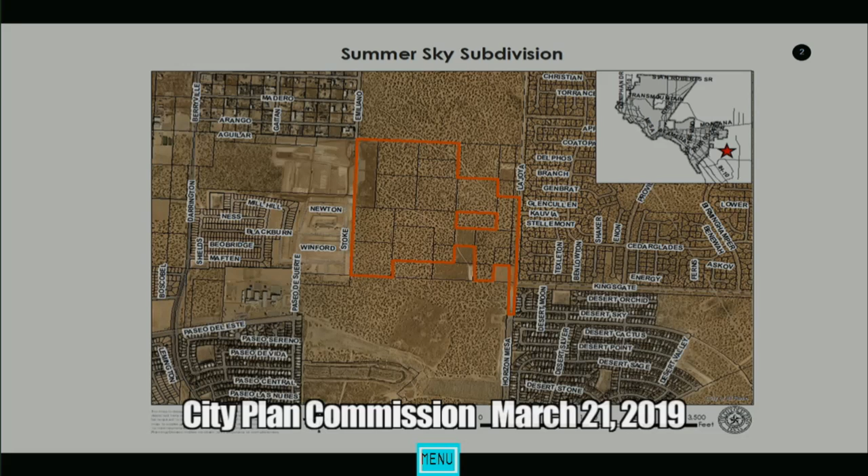Good afternoon, Chair, members of the Commission. Brenda Cantu with Planning and Inspections. Item number 1 on the agenda is Summer Sky Subdivision, a major preliminary application. Before I begin, I wanted to make a floor amendment to the first page of the staff report. It's stating under the summary of requests that there's 598 single-family residential lots, but it should be 599.

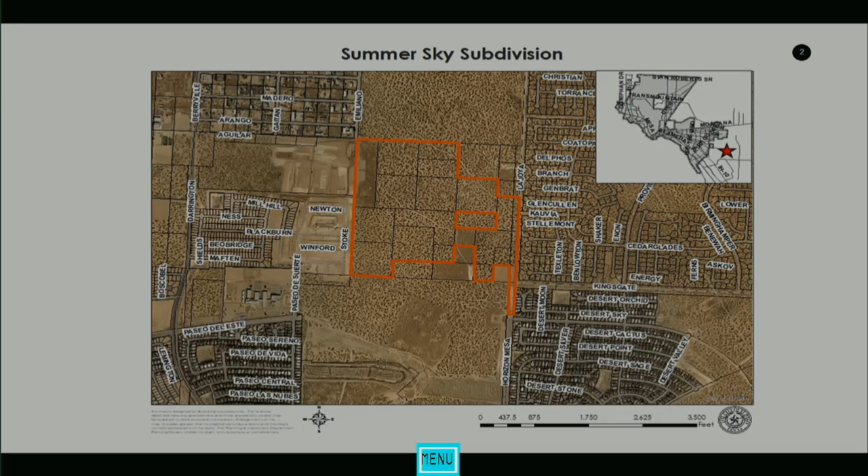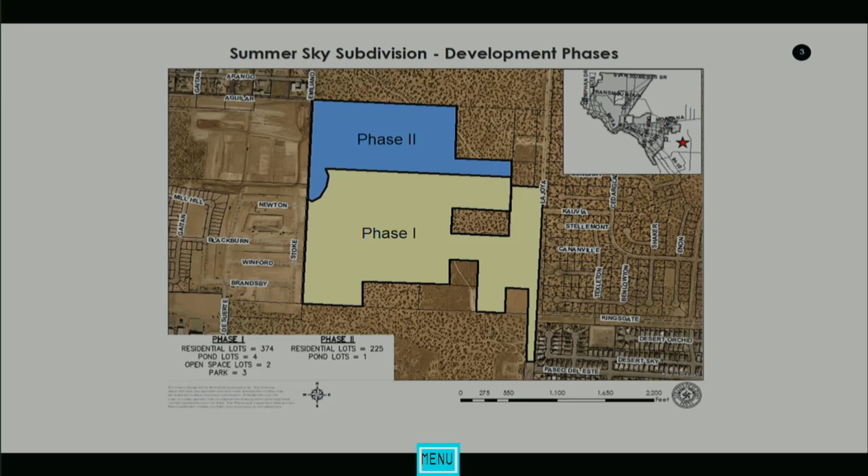This subdivision is located in the City of El Paso's ETJ, east of Darrington and north of Eastlake. The applicant proposes 599 single-family residential lots, 3 parks which include a linear park, and 5 drainage ponds. The proposed development will be done in 2 phases. Phase 1 is scheduled to be completed in September 2020, and Phase 2 will be completed by March 2022. This subdivision is being reviewed under the current subdivision code, and primary access is through Horizon Mesa, Garforth Avenue, and Winford Avenue.

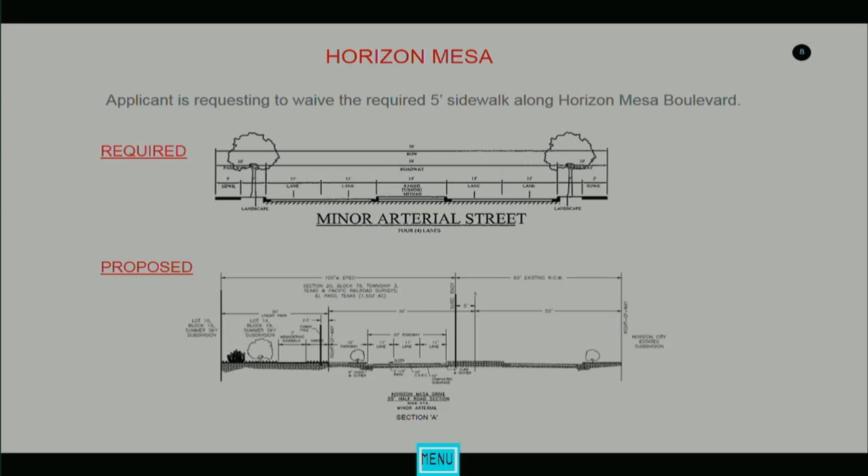This is a preliminary plat. The applicant is requesting to waive the required 5-foot sidewalk along Horizon Mesa Boulevard. In lieu of the sidewalk, the applicant is proposing a meandering 7-foot sidewalk within the abutting linear park on Horizon Mesa. This is required in the proposed cross-sections, required and proposed for the local residential streets.

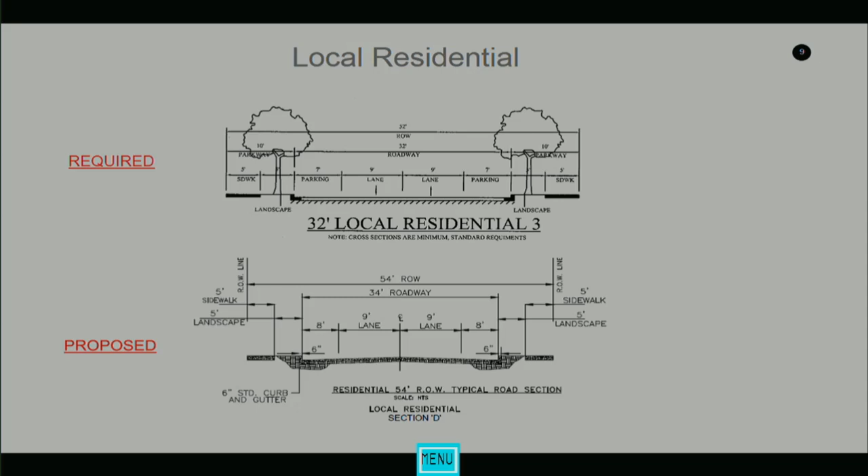Development Coordinating Committee and staff recommend approval of Summer Sky Subdivision on a major preliminary basis, and that concludes my presentation. Thank you. Any questions for staff? Nope. Can we hear from the applicant, please?

Good afternoon, Chair and members of the Commission. Santiago Vallejo for the record. Item 2 on the agenda is CMC Unit 5, a re-subdivision combination application. The subdivision is located west of Resler and south of Transmountain. Here's the aerial. The applicant is proposing to subdivide 20.596 acres into 5 commercial lots.

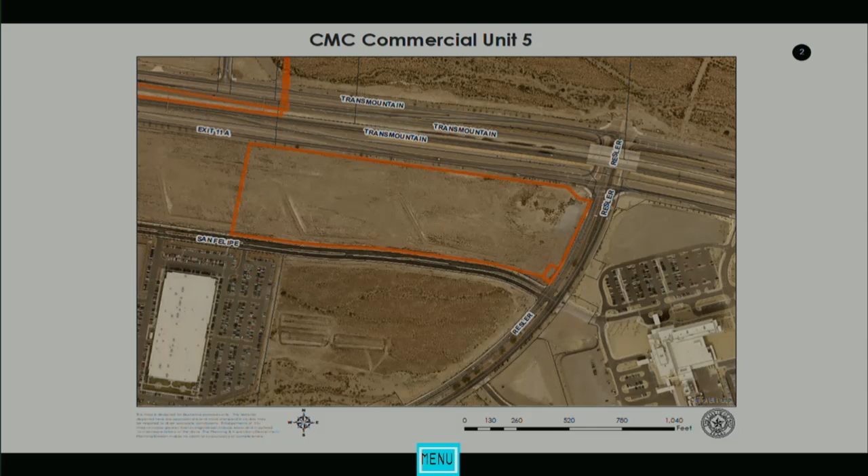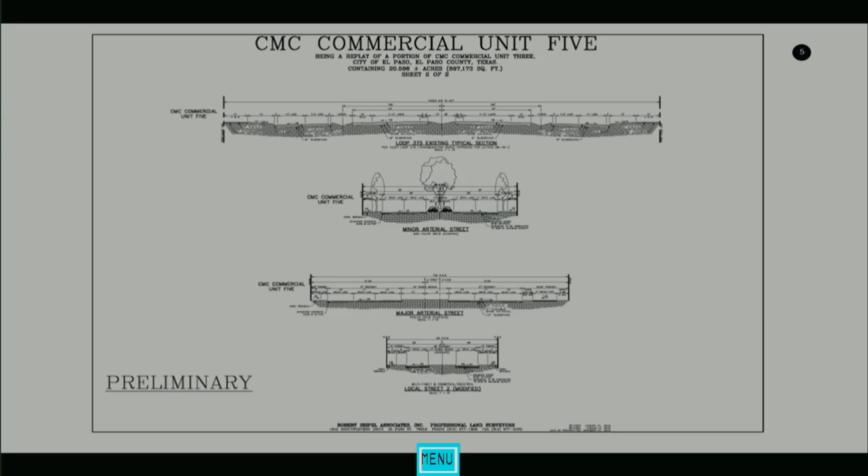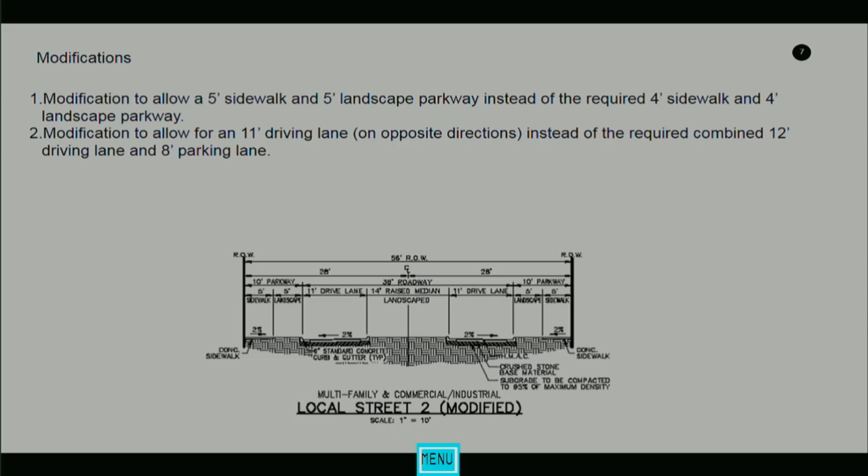The applicant is requesting a modification to allow for a 5-foot sidewalk and a 5-foot landscaping area within the cross section found on this slide. They're also requesting a modification to allow for 11-foot driving lanes in opposite directions. The overall right-of-way will increase to 56 feet.

Planning staff and the DCC recommend approval of CMC Commercial Unit 5 on a re-subdivision combination basis, and also recommend approval of the requested modifications. Thank you, that's my presentation.

Thank you. Any questions for staff? May we hear from the applicant, please? Good afternoon, Chair and members of the Commission. Adrian Ontiveros with CSA Design Group.

We concur with staff comments with the exception of streets and maintenance. However, we're going to continue discussions after action has been made today. We'll continue to coordinate and find a resolution with streets and maintenance.

Okay, what's the issue? Is there an issue? They're questioning the acceptance of the proposed right-of-ways as public. However, we're going to continue discussions after today's hearing. We've already coordinated with streets and maintenance. We're just going to continue discussions.

Great, thank you. Any questions for the applicant? This is under the public hearing section. Although no one signed up to speak on this item, now would be your chance. Nope. We'll go ahead and close for further discussion or motion.

Motion to approve. Second. All in favor? Aye. Thank you. Thank you very much. Item number 3, SU 17-00030.

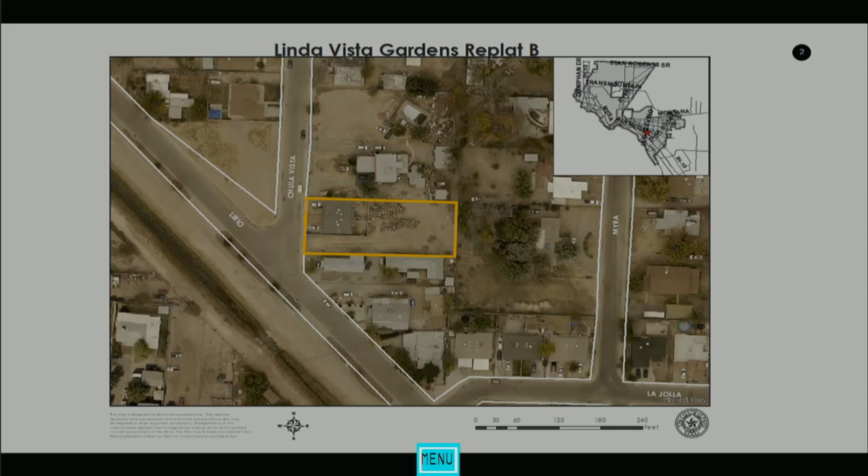Access to the subdivision is from Chula Vista. This is a final plat superimposed onto the aerial. The applicant is proposing to re-subdivide .4397 acres. The proposed development is for a single-family home and an existing duplex. This subdivision was reviewed under the current subdivision code.

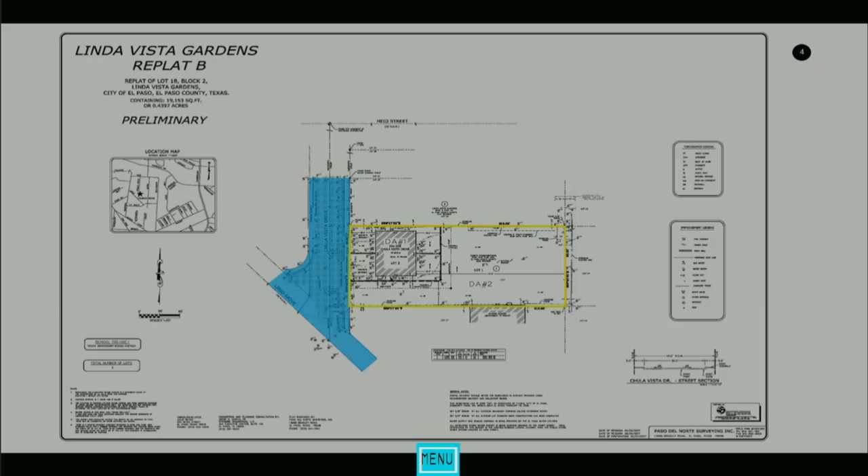This is the preliminary plat. This is the final plat. This is the existing and required cross-section for Chula Vista. The applicant is requesting an exception to waive the required street improvements to the applicant's proportionate share. Currently, the applicant is short 1 foot of additional pavement and the 5 feet required of landscape parkway.

The applicant proposes to preserve the existing configuration of Chula Vista, which consists of a 40-foot right-of-way with 30 feet of pavement and 5-foot sidewalks.

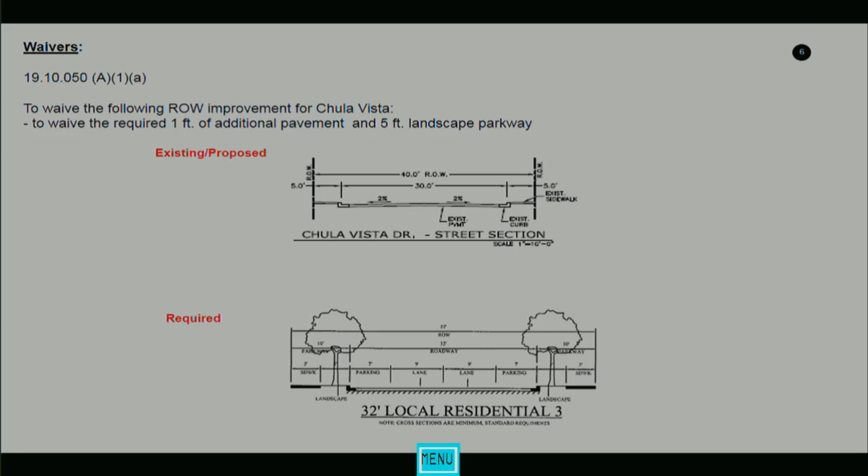Under section 19.10.050A, the City Plan Commission may waive such requirements to provide right-of-way or street improvements to adjacent substandard roads if 50% of the lots within a quarter mile of the proposed development have already been developed and the existing street improvements are in character with the neighborhood.

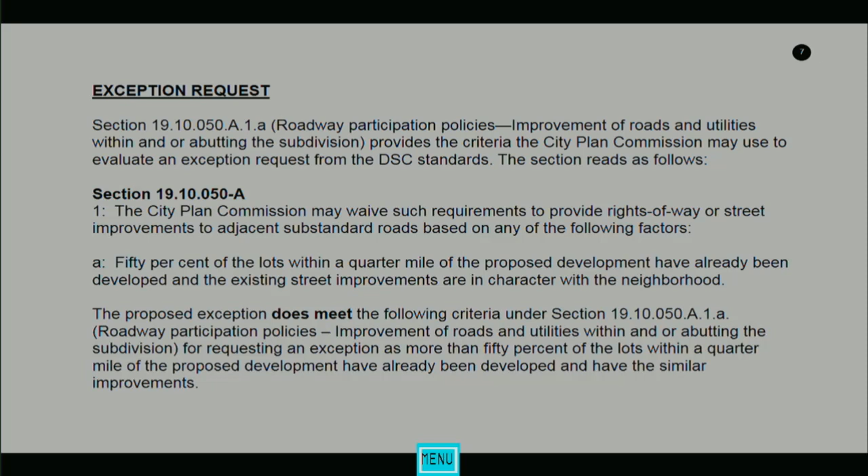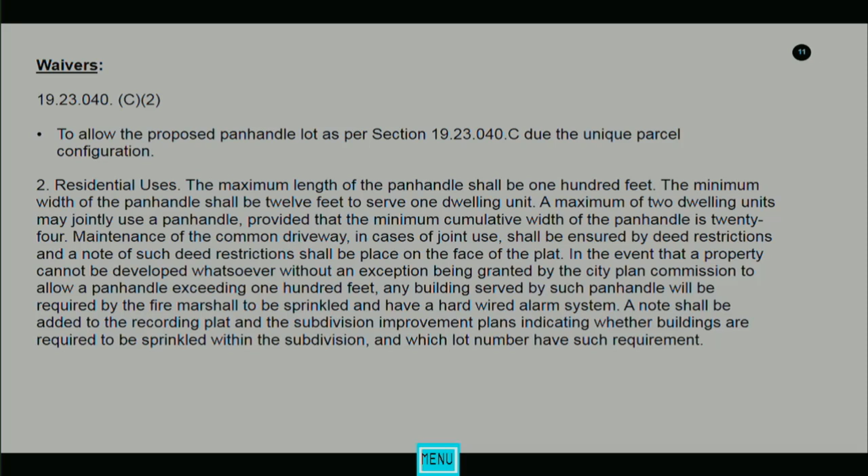And planning did not receive any communication, and additionally, the applicant is also requesting an exception request to allow the proposed panhandle lot as per section 19.23.040 due to the unique parcel configuration.

Planning did not receive any communication in support or opposition to this request. With that, planning recommends approval of Linda Vista Gardens Replat B on a re-subdivision combination basis. That concludes my presentation. Thank you. Any questions for staff? May we hear from the applicant, please?

Hello, City Council. My name is Julio Reyes. I agree with everything. Okay, thank you.

Any questions for the applicant? Nope. This item is listed under public hearing section. No one signed up to speak on it, but now would be your opportunity. Okay, we'll go ahead and close for further discussion or a motion. Motion to approve. I second. All in favor? Aye. Thank you.

Item number 4, SU 18-00105.

Good afternoon, Chair and members of the Commission. Giovanni Francia with Planning and Inspections. Item number 4 is Sunrise Acres number 1, Replat H. This is a re-subdivision combination.

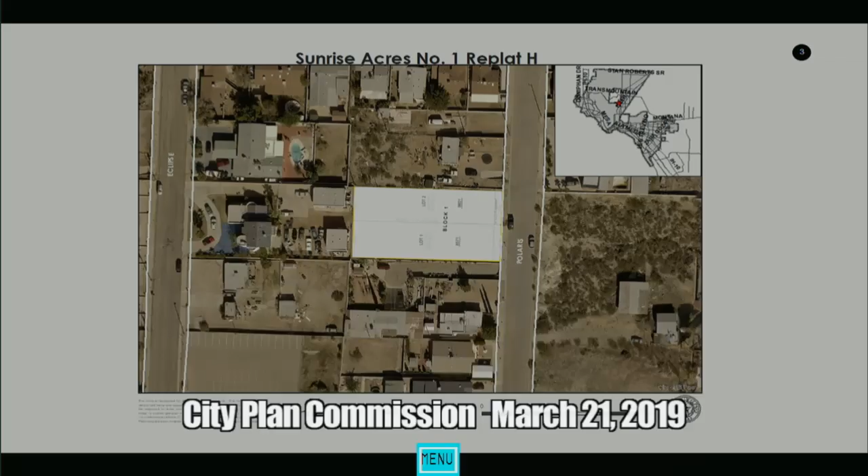This development is located within the City of El Paso. Primary access to the subdivision is proposed from Polaris Street. This slide shows the proposed final plat on the aerial picture. The applicant proposes to subdivide approximately half an acre of land into 2 residential lots.

Polaris Street is a local street, which requires that the right-of-way be a total of 52 feet, consisting of a 32-foot roadway, and 2 10-foot parkways consisting of a 5-foot landscape buffer and a 5-foot sidewalk. The right-of-way proportionate share is 26 feet. The applicant has 25 feet. The applicant is dedicating 1 foot in order to meet the proportionate share.

The proportionate share of the roadway is 16 feet. 20 feet currently exists; this is 4 feet over the required minimum. The parkway is currently a total of 5 feet, consisting of only a sidewalk. The 1 foot of dedication will be added behind the sidewalk. The applicant is requesting to waive 4 feet of landscape parkway for Polaris Street and to allow the existing sidewalk configuration to remain.

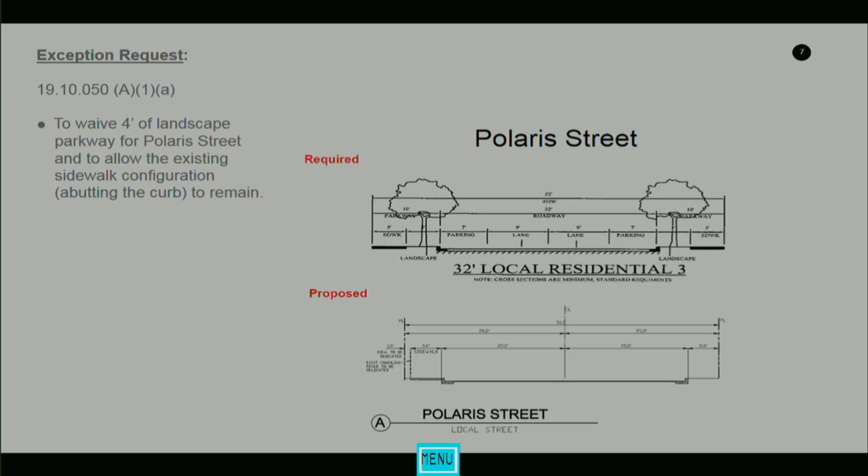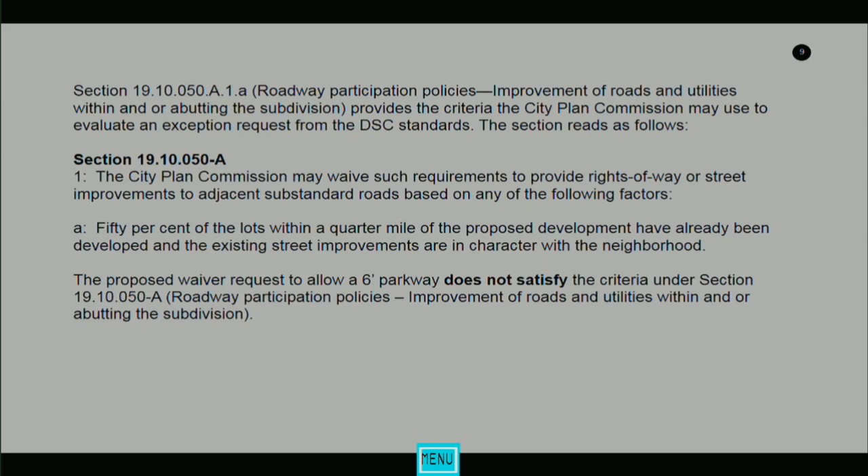The applicant is applying for the waiver under subsection 1A, which states that 50% of the lots within a quarter mile of the proposed development have already been developed, and that the existing street improvements are in character with the neighborhood. The applicant does not satisfy the criteria under section 1910-050A.

Planning and DCC recommend approval of the subdivision on a re-subdivision combination basis and denial of the street improvement exception request for Polaris Street. Staff received 5 phone calls inquiring about the proposed subdivision. Staff did not receive support or opposition to the proposed subdivision. With that, this concludes my presentation.

Okay, I have a question. Sure. The denial on the exception, that's just coming from DCC? Correct, not me. Thank you. Any other questions for staff?

Go ahead. I was just wanting to see on the pictures that you last showed - this is to show how it is right now, and the exception would not be in conjunction with this? Correct. So these are meeting the DSC standards? Right. Okay, that's what I wanted to confirm. That's all. Any other questions?

Okay, may we hear from the applicant? Fermin Dorado from Dorado Engineering, representing the owner.

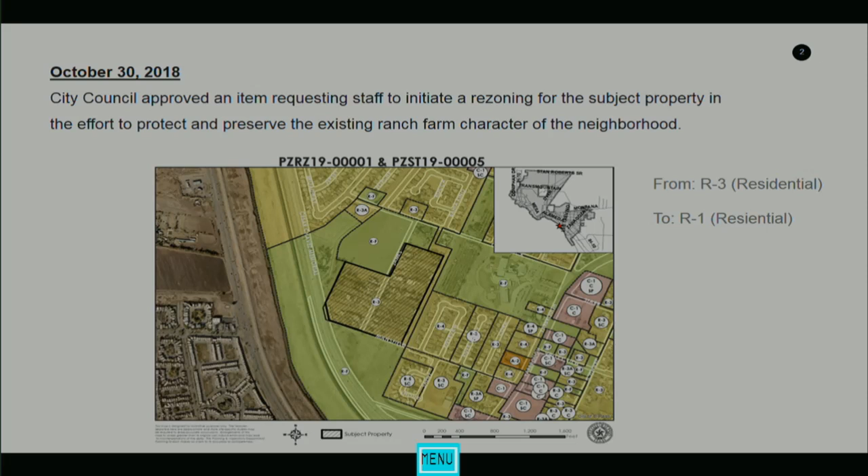This is an aerial of the property showing 26 total properties, all with existing improvements, the majority consisting of single-family homes along with numerous accessory structures. The total acreage of the entire area being rezoned is 23.6 acres.

There is also the special permit for the planned residential overlay, which will address the setbacks imposed as part of the proposed R1 zoning district. The properties with existing structures have no major changes proposed - whatever is there is already there, along with all street improvements. The overlay addresses the setbacks forthcoming under the R1 district.

Regarding those setbacks: the front setback will be reduced from 30 to 25, the cumulative from 100 to 65, the side from 15 to 0, side street 20 to 5, and the cumulative side and side street from 40 to 20. This addresses the existing conditions of the single-family homes and brings them into compliance with the R1 district.

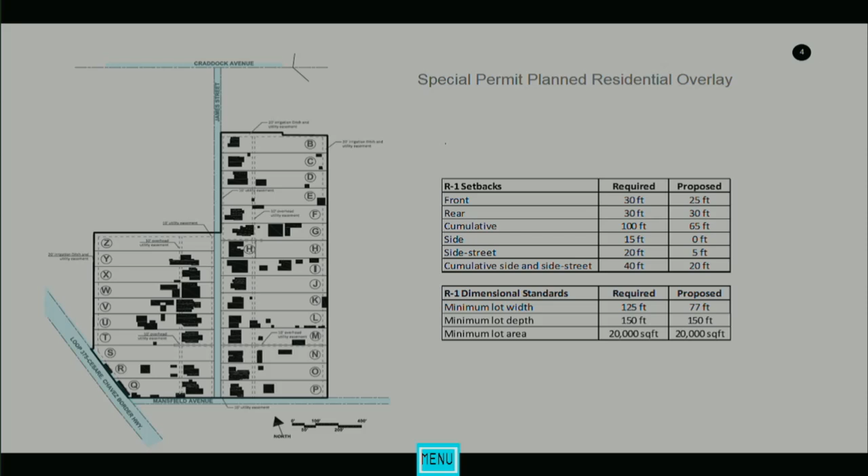As far as dimensions, only the lot width is being reduced from 125 to 77 feet. The lot depth and lot area will remain the same, as the majority of these properties are just under 1 acre in size.

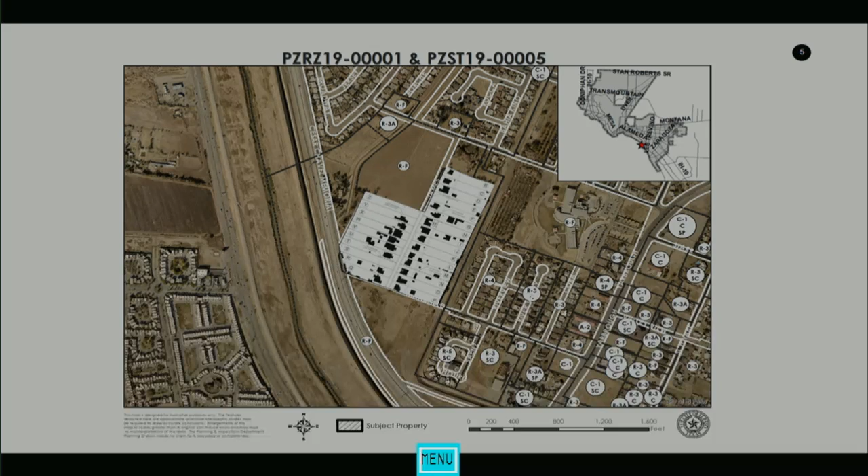This is the detailed site plan superimposed on the subject property, along with a shot of the property and surrounding properties.

To the north, there are vacant and single-family homes in ranch farm zoned properties. To the west, there's the lateral as well as single-family, also zoned ranch farm. To the south, there's vacant property and Loop 375, also zoned ranch farm. To the east, ranch farm and R4 with single-family as well as a pre-K school located there.

Staff and DCC recommend approval of both the rezoning and the special permit for planned residential overlay. Notices were sent on March 8th, 2019 to all property owners within 300 feet of the surrounding area. Staff did not receive any calls, emails, or letters in support of or opposed to this request. That concludes my presentation, thank you.

Any questions for staff? Madam Chair, if I may - I want to say thank you to Raul and also to the residents. This is a very good instance where the city, as a home rule city, exercises its police power to protect and preserve an existing neighborhood. One reason the city has this police power is that it doesn't want to see the erosion of an established neighborhood because of density.

So this area is well established as a very low density residential area, and the city has a legitimate interest in preserving that in perpetuity. So that's the reason this is before you today. Raul has done a good job, and I also want to thank the residents as well.

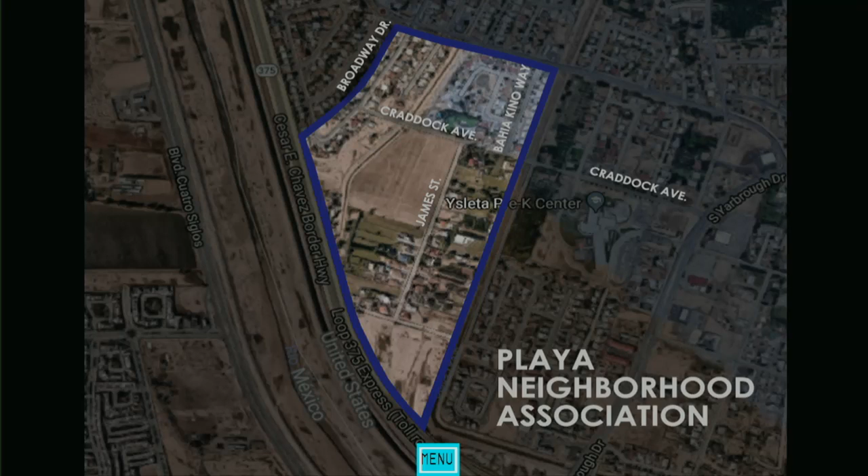So within our bylaws, the main statement of purpose is to maintain the rural characteristics of the neighborhood. Back in January 2018, a little bit more than a year ago, all the neighborhood associations around the area, as well as many throughout the city, came together to speak about this item, a development proposed in this area that was going to really destroy the character of the neighborhood.

We came together to demonstrate that this is a very unique area within the Mission Valley, and because of that we had at that time more than 400 signatures and 50 letters opposing that development. We came here to the CPC, and all of you recommended denial, and we really appreciate it. We thank you for that.

For some strange reason, after that, a developer is supposed to have, per Title 20, 30 days to come back to City Council if he wants to appeal. But for some strange reason, he was allowed to come back all the way, instead of 30 days, more than 100 days later, or 97 days actually, almost 100 days. So we were here in June 2018, and at the time, the developer decided to withdraw his application, and the City Council actually deleted the item, so it did not go through.

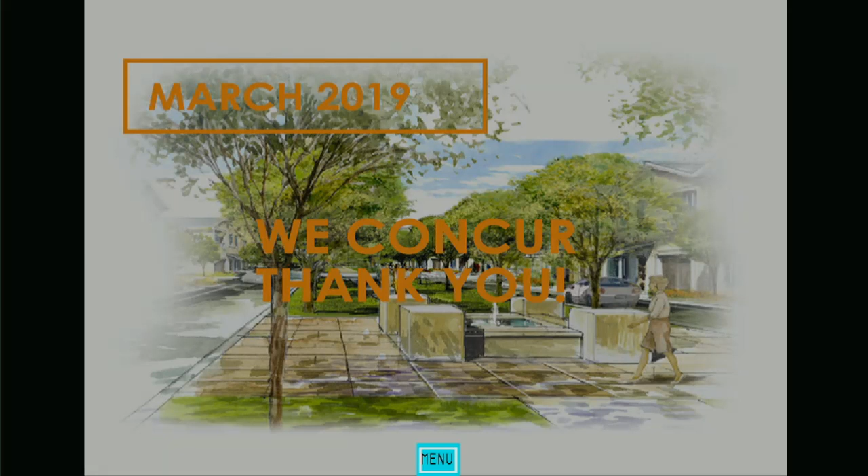So today we're here to concur with staff recommendation, and we're hoping that you really do recommend approval on this. We thank you very much again, because if it wasn't for that a year ago, we wouldn't be here. So we really appreciate it.

Thank you very much. Thank you, Ivan. Well, you should give yourself a little credit because you fought the fight for everybody. So good for you. It's all of us here. Yep, all of our neighbors, a lot of our neighbors are here. So we all wanted to stand together on this and say thank you. We're going to miss you, Ivan.

Fabiola: Good afternoon, all, Chair and Commissioners. He stole all my lines, and I'm just going to repeat the same thing, but I have my own speech. For the record, my name is Fabiola Campos Lopez, and at this time I present myself before you as a resident of James Street and member of the Playa Neighborhood Association.

Playa Neighborhood Association's journey with this rezoning case started 15 months ago. After June of last year, when the rezoning case ordeal terminated, Playa Neighborhood Association dedicated endless hours of research, countless meetings, and with the assistance of planning staff, the discrepancy on the zone code was found in our property lots. Our lots measure more than 40,000 square feet, and we were incorrectly zoned as 5,000 square foot lots for the last 40 years. On October 30th of last year, this zone code discrepancy, with all the evidence on record and with the assistance of planning staff, was presented before City Council, and all representatives unanimously voted to correct the discrepancy and directed staff to initiate the zoning process in a neighborhood plan.

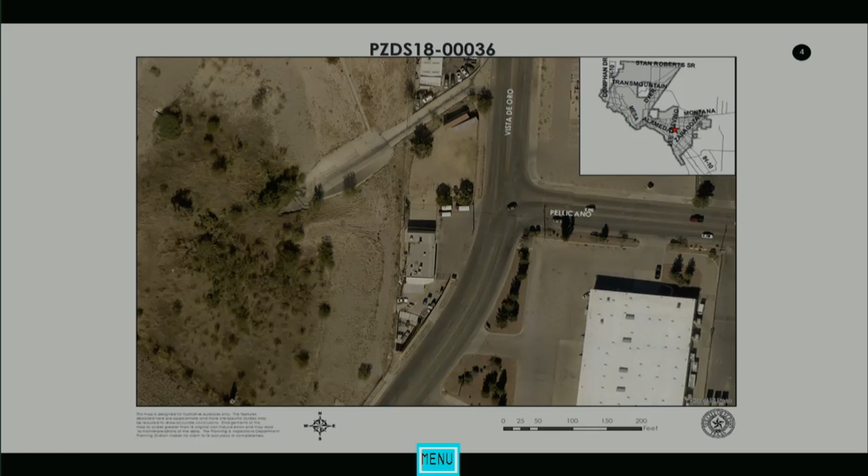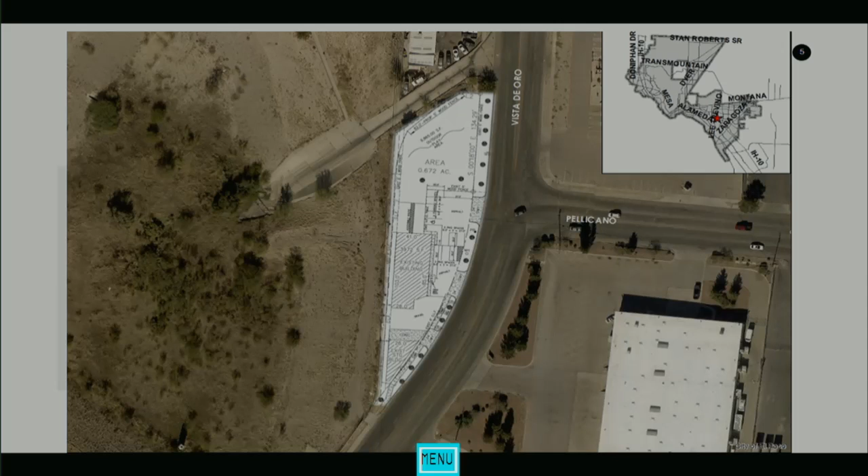This is an aerial photo depicting the subject property in its current configuration, as well as its surroundings. This is a site plan superimposed on the aerial, showing the existing daycare center, the building constructed at the southerly portion of the lot, and the play area. It should be noted that the site plan demonstrates compliance with all applicable requirements, including the additional supplemental use regulations for child care centers under 20.10.140, which impose additional requirements for child care facilities.

North is zoned C4 and PI, commercial and planned industrial, with various commercial uses. East is zoned M1, I believe, and is a leather works where they take leather and make it into things. South is C4 special contract, and there is a truck terminal there. West is RF, Ranch and Farm, and it contains a stormwater retention basin.

Because this is a detailed site development plan, public notice was not required, and no public comment was received on this item. Planning staff is recommending approval, and the Development Coordinating Committee recommended approval. With that, my presentation is concluded. Thank you. Any questions for staff?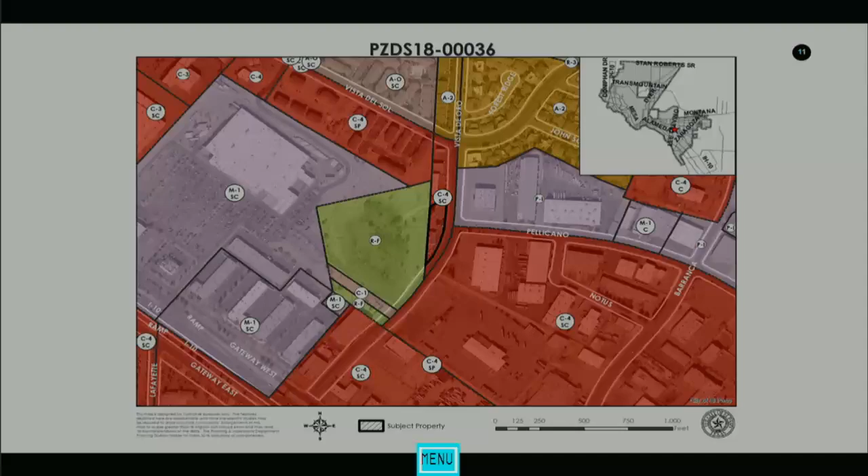May we hear from the applicant? Good afternoon, Chair and Commission. Thank you, we agree with all comments. Can you state your name for the record, please? Leith Labrado. Thank you. Any questions for the applicant?

No. This is under the public hearing section. No one signed up to speak on it. Now would be your opportunity. No one? We'll go ahead and close for further discussion or a motion. Motion to approve. Second. All in favor? Aye. Aye. Thank you.

Item number 10, discussion and action on an ordinance amending section 19.20.070, deed conveyance, to clarify requirements for the conveyance instrument and to allow for deferral of delivery of the conveyance instrument under a particular circumstance.

Sounds complicated, Nelson. It's not. Oh, sounds very fancy. Nelson Ortiz with Planning and Inspections. Good afternoon. Hi, Nelson.

Yes, this is a code amendment to Section 19.20.070, deed conveyance of Title 19. The first aim, as you mentioned, is to identify the conveyance instrument, the type of conveyance instrument. The second reason we're proposing this amendment is to allow the deferral of the instrument delivery to a different time. Time or type? Type, I'm sorry. To a different type? So the first one is to identify the type of deed, and the second is to allow the deferral of the delivery of the deed. Okay, I'll get into both of them a little later.

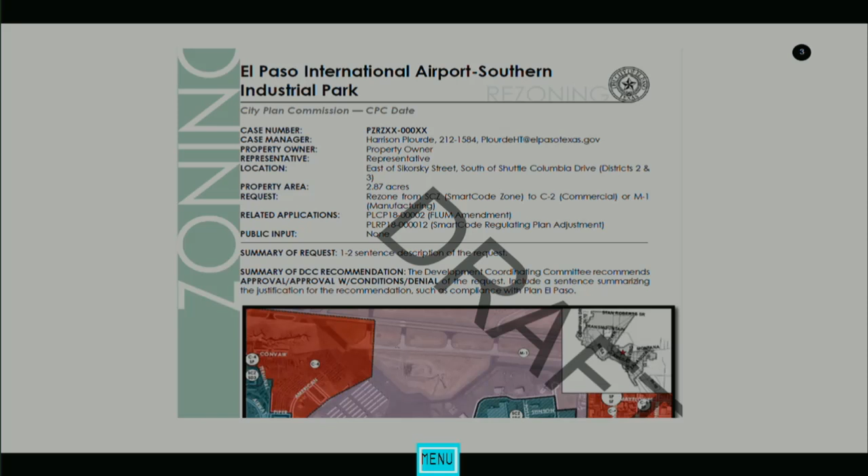For zoning cases, there were two set tables in every staff report. What we found is that one of those tables was not being completed for what it was really intended for, which was an example of information being duplicated unnecessarily. So in the new format, you'll see one table with your analysis against Plan El Paso policies that are relevant. The copy of the rezoning application or staff report you have lists on the right-hand column of that table all of the questions that staff ask themselves in order to complete that analysis for that particular goal or policy from Plan El Paso.

Up to this point, the zoning and subdivision cases have had a neighborhood character section, which has primarily consisted of the surrounding zoning districts, and distance to nearest park and school. That's going to stay in the zoning staff reports, and there's a description of what we're including in that section in the sample you have.

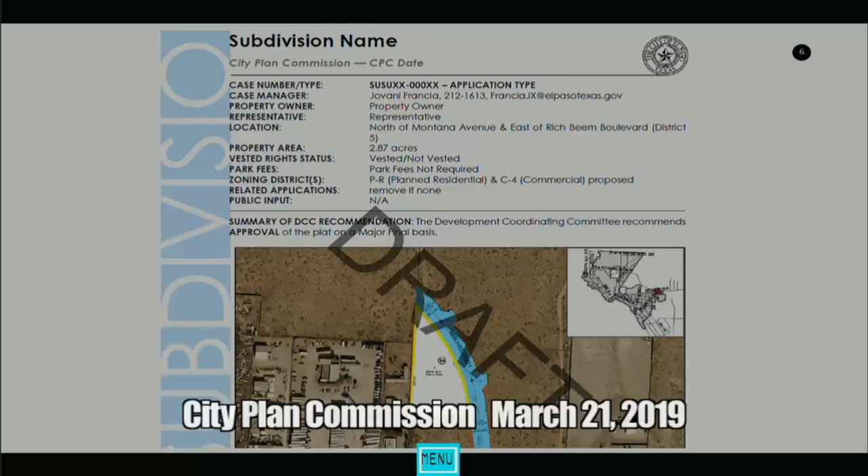So this is an example of a subdivision staff report. They're very similar, just slightly different information for subdivisions than for zoning. And the section about CPC options is much shorter. That's all I have for you.

Please take a look at the samples we've provided. If you have any comments, questions, or concerns, let us know. We're not going to implement these two weeks from now, but maybe four weeks from now, so you have time to get feedback to us, and then we can finalize and get staff working on them. If you have questions, please redline those and send them to us. We'd like to implement as soon as possible and not wait another 6-7 weeks.

Got it. So this is just a presentation, there's nothing more. Okay, sounds good.

I noticed that we did not have a line item on the agenda with regards to accepting the previous meeting's minutes. Are we not doing that for some reason? That was my mistake, we'll put it on the next agenda.